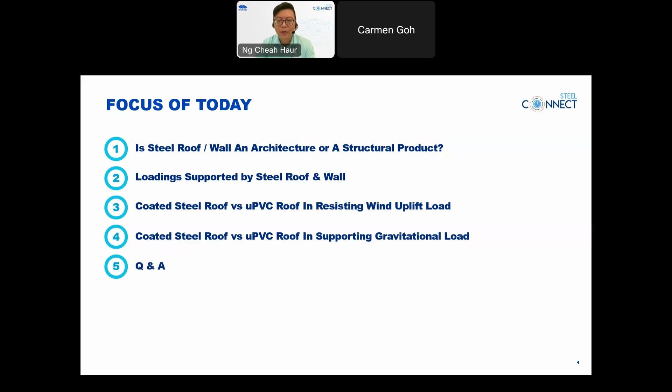Of course, we will explore what kind of loads are supported by the roof and wall, especially in the coated steel. Then lastly, I will compare the wind uplift capacity and how the gravitational load is supported by the coated steel product and also the UPVC roof, right? And by the end of the session, as I mentioned just now, we are open for Q&A, and I will answer the questions from the floor. Just to share with you, this is not a lengthy knowledge sharing, but it will consist of a few pieces of information that might be worth taking away after this session.

All right. Okay, without further ado, let's start with the first topic of today, which is to identify whether the coated steel roof and wall is an architectural or structural product. Because today we're talking about the loading challenges supported by the coated steel roof and wall, right? But if it is an architectural product, why is there loading acting on it? So this is what we're going to explore in this section. Okay, steel roof and wall is widely used in different types of buildings, right?

Range from, let's say, infrastructure, industrial, public utilities, commercial, residential, and etc. So the main function of the steel roof and wall is to protect the residents inside the building from the weather, and the secondary purpose is providing aesthetic appeal to the building.

So colors provide visual delight and design options, whereas the base steel offers sufficient strength capacity to support or resist loading that acts on the coated steel roof and wall. So this is how the coated steel roof and wall protect us from the extreme weather nowadays, and secure the building from break-ins also. So in short, the coated steel roof and wall should perform aesthetically and also structurally.

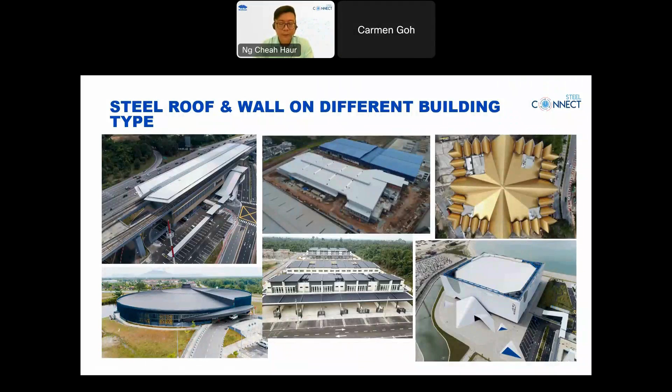Right. Since coated steel roof and wall need to perform aesthetically and structurally, who designs the coated steel roof and wall on the building? Does the architect design the coated steel roof and wall? Yes, it should be, because they are the professionals who design the building to present aesthetically, right? However, engineers should be involved too, because he or she designs the coated steel roof and wall to be structurally sound. So in short, yes, both of them are involved in designing the coated steel roof and wall.

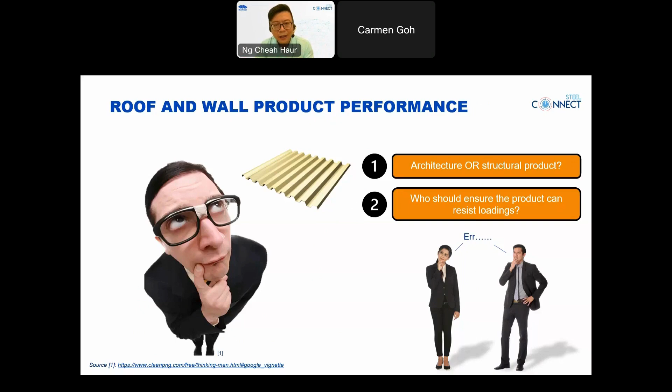So some of you may still have the question: architect and engineer are both involved in the coated steel roof and wall design, so in that case, should coated steel roof and wall be considered an architectural or structural product? In addition, who should be responsible to check and ensure the product can resist or support loadings? Is it the architect or the engineer? Some may not be clear, right?

So let us take a step back to the basics and explore what architecture is and what engineering is. Architectural work is focused on the building and the physical structure design. In layman's terms, it means what kind of building or structure he or she designs. Whereas engineering work focuses on the technical and structural aspects of construction. So in short, it is how the building or the structure is being constructed. So there are two different aspects in two areas, right?

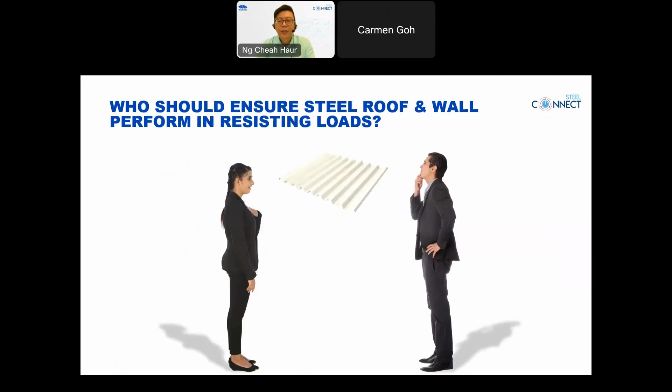So based on the description of architecture and engineering scope of work in the previous slide, the coated steel roof and wall is actually in a very awkward position, right? It's like a kid without a mom. On one hand, the architect thinks, I am responsible for the coated steel roof and wall design and the rainwater runoff calculation for the steel roof only, and the steel roof and wall structural performance should be the engineer's responsibility.

But on the other hand, the engineer thinks, yes, I'm responsible for the structural design up to the purlin or girt. The steel roof and wall should be under the architect's design because it's an architectural product. So is it true that none of them should be responsible for the product performance in terms of loading support or resistance, even though both professions are involved in the coated steel roof and wall design? Okay, let's explore in a little more detail what the architect and the engineer do in the coated steel roof and wall design.

The architect is in charge of selecting the right profile and the colors for the coated steel roof and wall design, does the detailing methods, and is also responsible for calculating the rainwater drainage from the roof. And the engineer is responsible for the loading design and the building structure design, and their liability is maybe only up to the roof purlin or the wall girt design. So whatever components or cladding over the roof purlin or the wall girt are not the engineer's responsibility, right? So based on the responsibilities of the engineer and the architect as described, should coated steel roof and wall be considered an architectural or structural product?

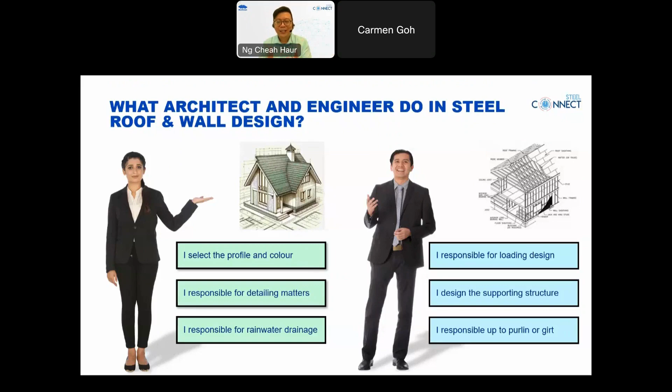Hard to say, right? It's still in the dilemma stage. So let's analyze it in detail in the subsequent slide. Okay, based on this building sketch, the building will be exposed to the wind load that acts on the roof and wall, right? In addition, the human traffic load also acts on the roof because people need to walk on it to survey, maybe to do some integration of systems like solar panels or safety lifelines or other things on it. So there will be gravitational load on top also.

So now let's analyze each component of the building, all right? Okay, start with the purlin. Purlin, there's no argument at all. This is a structural product because it's mainly used to resist wind load and support downward load at the same time, which is the human load. This is for the purlin. And wall girt is the same as purlin. We can say it's 100% structural product because it is used to resist the wind load only, all right?

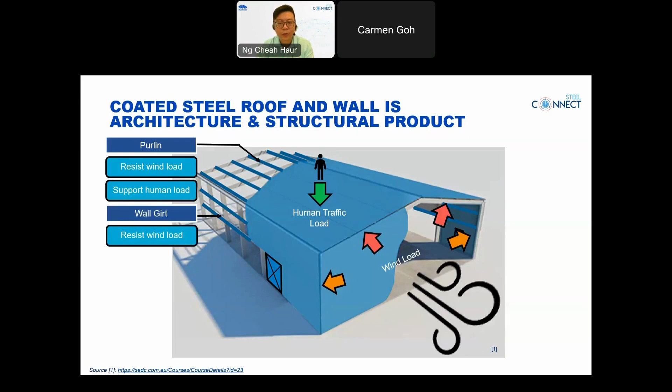Okay, now let's take a look at the coated steel wall. The cladding is provided to be aesthetically pleasing for the building design. However, at the same time, it is used to resist the wind load. All right. So now let's take a look at the roof. It is used to provide visual delight and also drain out the rainwater effectively. At the same time, it is used to resist the wind load and support the human traffic load. So therefore, coated steel roof and wall is considered an architectural and structural product. So it's not either one, all right?

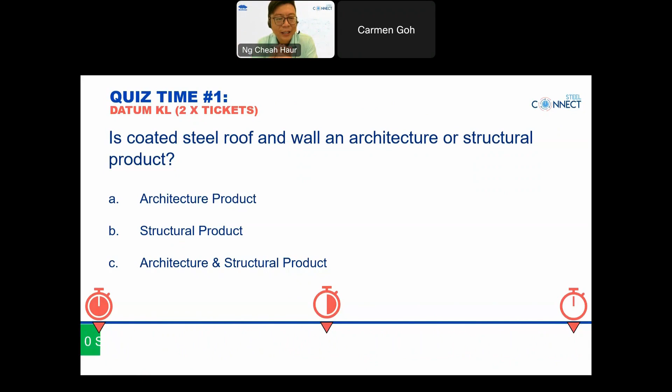So is coated steel roof and wall an architectural or structural product? A is purely architectural, B is structural, and C is architectural and structural product. You can start your answer now, giving 10 seconds. If you haven't gotten through all the slides just now, you can just guess. All right, time's up. So the answer is C, architectural and structural product.

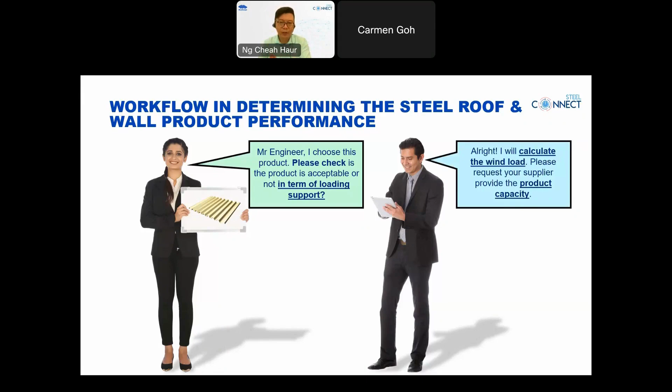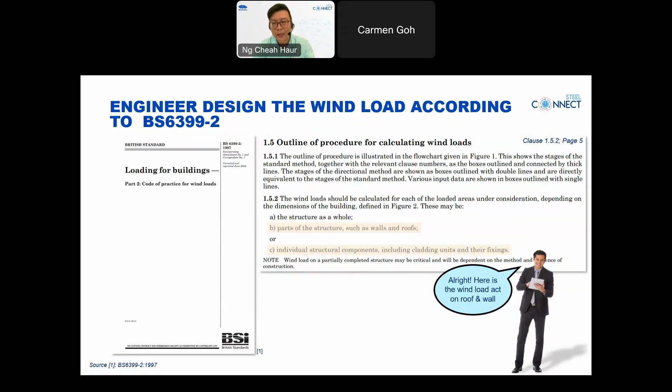Next, actually, the architect should pass the information about the product performance capacity to the engineer. Then the engineer will calculate the wind load and compare the product performance capacity with the design wind load. So how does the engineer design for the wind load? In general, the engineer will calculate the wind load using BS 6399 Part 2. Based on clause 1.5.2 on page 5, as shown here, it's clearly stated that the roof and wall or cladding units and their fixings should be considered as a loaded area, and should be checked by the engineer. So the engineer will base on that to calculate the wind load and check whether the roof or wall sheet is able to sustain the wind load.

All right. Optionally, the engineer can also use another code, called MS EN 1991-1-4. Refer to clause 1.1, bracket 1, on page 9 of this code. It also states that the cladding units and their fixings should be considered as a loaded area, and should be designed and checked by the engineer.

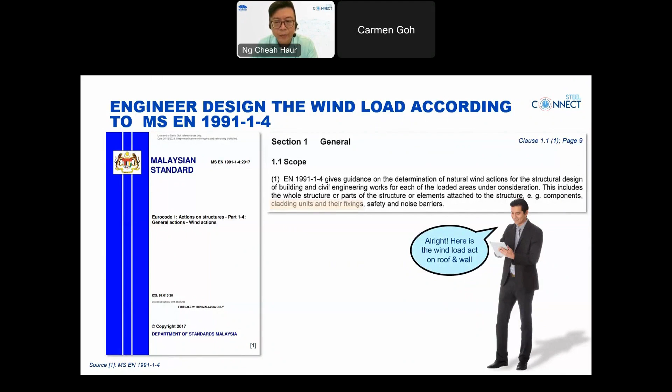All right. So the engineer will check based on the code that I mentioned just now, either BS 6399-2 or MS EN 1991-1-4, and then compare the design wind load to the product wind uplift capacity. The result of the checking can be either the engineer approves the product because it is able to resist the wind load, or the engineer will advise the architect to select thicker material or choose another product because the wind load capacity of the original product is lower than the calculated wind load.

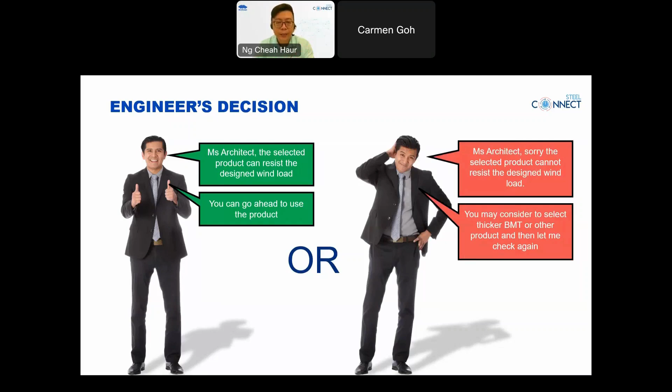So this is the engineer's decision after they calculate the wind load, all right? Okay, we are talking about the wind load on the roof and wall, but how is the wind load acting on it? In addition, what other load is supported by the coated steel roof and wall, right? So we will explore it in this section now.

Okay, basically there will be two major forces acting on the coated steel roof and wall. The first one we simply call a push and pull force, which is the wind load that creates the negative or positive pressure on the coated steel roof and wall. It causes the roof or the wall to either lift up or suck into the inner space. However, in most cases, the lift up action happens.

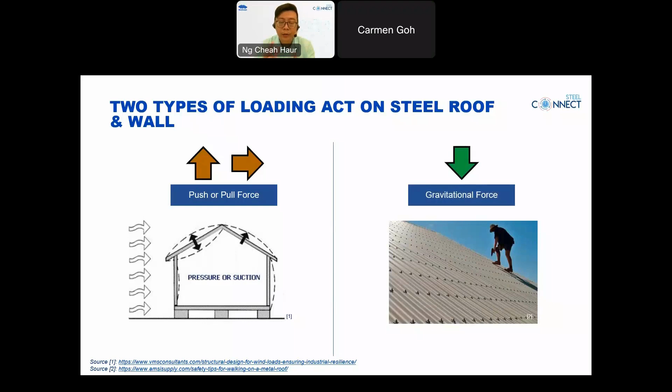All right. So the second one is called the gravitational force. This is the pushing down force caused by gravity. Normally the force will be acting on the roof, and it is caused by human traffic or the temporary construction load. There will be two types of forces that may act on the coated steel roof or wall. Okay, so let us explore them one by one. Let's start with the wind load.

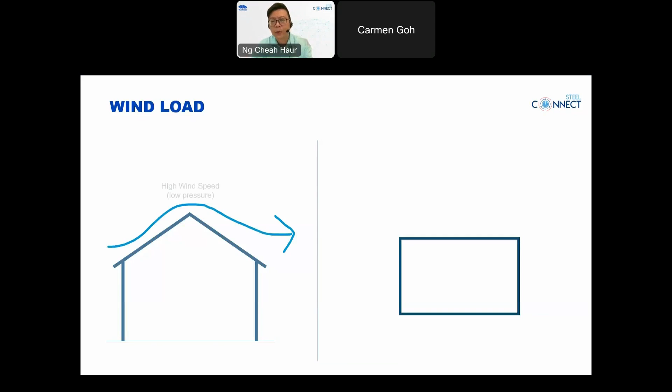Okay, the concept of the wind load acting on the roof is very simple. According to the hydrodynamic concept, when the fluid is moving very fast, the pressure gets low. In reverse, the pressure is higher if the fluid moves slowly. So hence, when the wind flows at high speed over the roof due to the aerodynamics, it creates a lower pressure compared to the inner space of the building where the air is static. As such, the higher pressure inside the building will push the roofing out, and that is how the uplifting effect happens on the roof.

All right. The same scenario will happen on the wall too. The higher pressure from the inner space will push the wall outwards when the low pressure is happening outside due to the high wind speed. So normally the wind uplift effect on the roof is more severe than the pushing out of the wall. That's due to many reasons such as the aerodynamic effect, the support spacing, and also the wind speed, etc. So due to all this, you hardly see the wall fail in wind, but you will see it more on the roof.

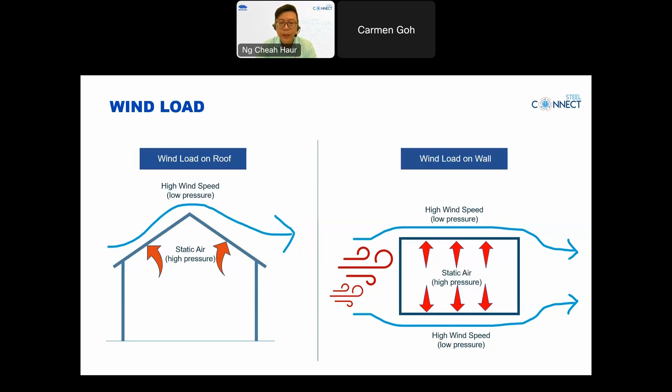Okay, as I mentioned just now, the short clips that you saw are the most extreme cases of roof failure. So from another angle, maybe someone will ask, does it mean that as long as the roof does not fly away, there's no failure? I can give you the certain answer: no. As such, we shall define well the principle of the roof's capability to resist the wind load. In other words, how we judge that the roof has failed under wind load even though it does not fly away. I hope the following info can help you choose the right product for your projects.

Okay, the first one we call the so-called serviceability stage. What it means is we should not allow the roof to over deflect or bend upwards until it damages any mounting system on top of the roof, such as the safety lifeline, solar panel system, or even any flashing attached on top. When the roof over deflects or bends upwards, it will make the mounting system disengage and then it will fall from the roof.

All right. It is normal that the roof will deflect and bend upwards when the wind load is acting on the roof, and it happens whenever the wind flows over the roof. So the roof shall be able to return to its flatness when the wind disappears.

It shall not be permanently bent after the wind load is gone. So it means that when the wind is coming in, the roof is allowed to deflect upwards, but it's not that severe. You cannot accept that the roof is bent up like a balloon. It allows deflection upwards, but it's subject to the principle that when the wind is gone, the roof has to return to flatness as the original position. All right, this is how the principle is.

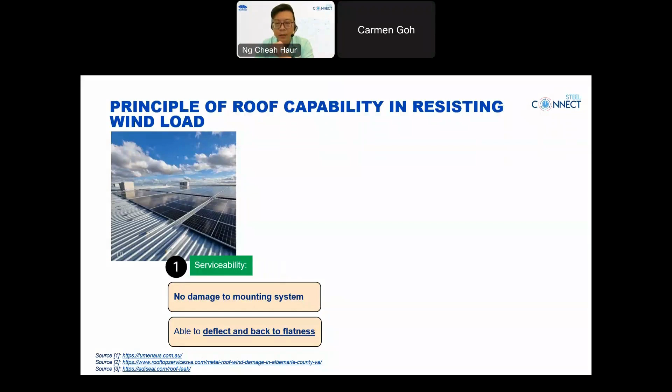So the next is about the strength stage. The roof might already be failed in strength, meaning it can no longer continue to support the wind load as guaranteed. The first principle is that the roof shall not cause water leakage immediately when it fails in strength. So even though the roof is allowed to fail in strength, it shouldn't cause instant water leakage when the storm is coming in.

Secondly, the roof sheet shall not break into pieces, or any item fly off from the roof when it fails in strength. So what does it mean? I purposely put this into the red box here, because I want to elaborate more about what does it mean by the roof should not break into pieces, with no fragments or broken pieces flying away.

For the long length roof sheet, it should not break or burst into pieces like a balloon when it fails in resisting wind load. Just like the short clip you saw in the previous slides, when the roof fails, it doesn't really burst like a balloon. It will fly off in pieces, or maybe buckle locally. The broken fragments or small components that fly off scatteringly will cause hazard to the public, so I will explain more in detail in the next section of this webinar. Just bear in mind that if the roofing sheet can break into full pieces, it's not acceptable.

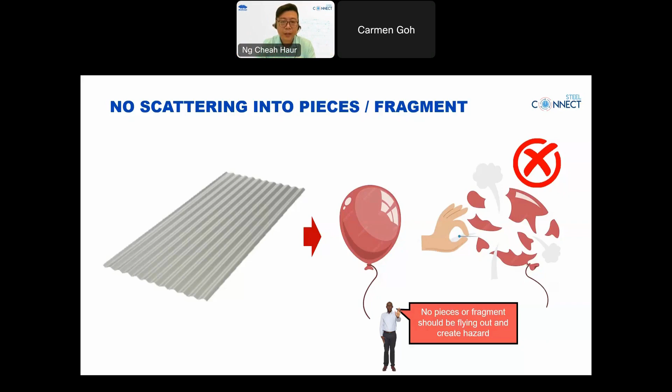So the answer is A. Congratulations to those who answered the right answer. Okay, let's continue.

So now we understand about the wind load and how to define the principle of the roof capability in resisting wind load. However, maybe some of you aren't sure how the wind load is calculated, so I'll share it with you now. As mentioned earlier, there are two design standards that can be used by engineers to calculate the wind load in Malaysia, which is either BS 6399 Part 2 or MS EN 1991-1-4. Both design standards share a similar design concept, and the wind load design method is quite similar too. So no matter which standard is used or referred by the engineer, the factors that affect the wind load design are the same. Let's explore it.

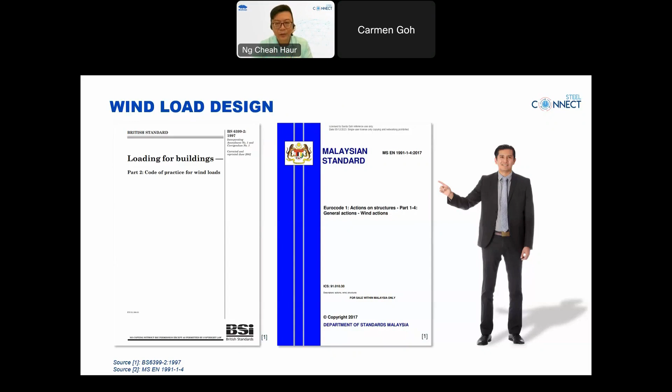The factors that determine the wind load acting on a building include, first, the wind speed. The second will be the altitude, the location of the building, whether at lowland or highland. The third will be the terrain, whether the site is on a plain field, surrounded by hills, or mixed. Lastly, the location of the site, whether at the seaside or inland, will affect the wind load. These are the geographic factors that cause the wind load to change according to the location of a building.

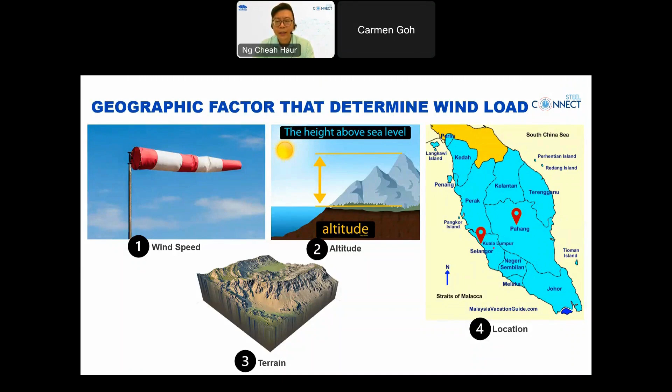So as such, we cannot assume that the wind load will be the same when the building is located at a different site, even though it is the same building design. Let's put an example: a building located at the seaside at Selangor, and the same building, same design, located at the mainland of Pahang - the wind load will be different.

Engineers should check and design the wind load of every building unless they have sufficient experience or sufficient past project reference, where they're aware that the wind load difference at the different site is negligible.

Let's put an example. This particular engineer already designed a lot of buildings in this Pahang area. They roughly know what is the wind load at this particular area with this kind of building design, so they can guess what wind load can be used. Otherwise, for each building design, you need to check on the wind load.

So this is the geographic factors. But we have another factor that affects it, which is called building design factors, like building shape and size, building distance, and then the opening design on a building such as the size and the number of windows and doors, or whether it's an open or enclosed space. And lastly is the roof type and roof gradient.

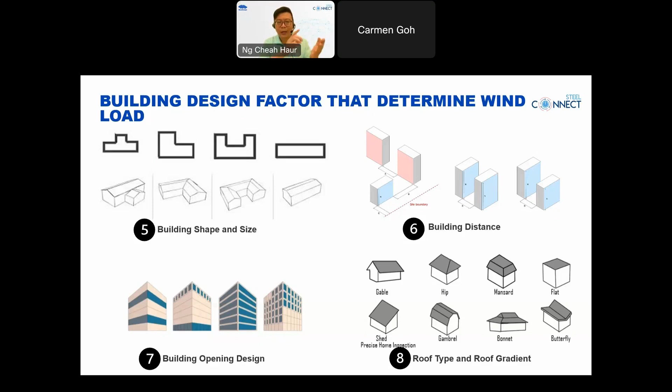Most people may not be aware that the type of roof and the gradient is an important factor that determines the wind load. They just assume this is part of the building design by the architect, but actually it's not. So I hope now we all understand that there are at least 8 factors, maybe more, that determine the wind load acting on a building - at least 4 in the geographic factor, and another 4 in the building design factor.

Based on the last 2 slides, we understand that the wind load is determined by at least 8 factors, and the wind speed is only one of the factors. As such, an engineer is not able to give you the answer about what level of wind speed the roof can resist. They can only tell you that they used XX wind speed in the design and the wind load is XX value. So what does it mean? I will explain in the subsequent slide.

So by right, the workflow starts with the engineer designing the wind load based on one of the two standards I mentioned - either BS 6399 Part 2 or MS EN 1991-1-4. They refer to these 8 main factors, then they will get a design wind load in the unit of kPa or kilonewton per meter square.

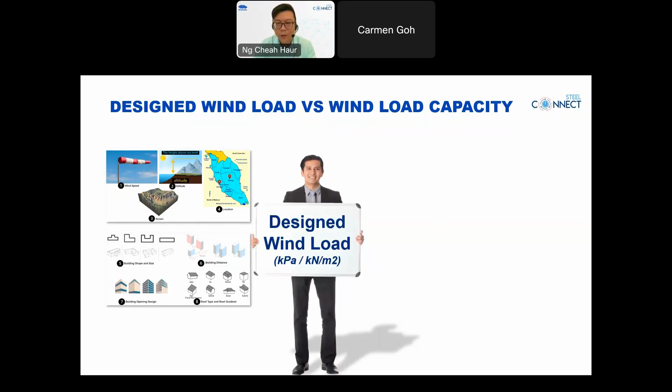The engineer can either pass the design wind load to the architect to check it with the product's wind load capacity, or they can help the architect compare the design wind load with the wind load capacity of the product, also shown in kPa or kilonewton per meter square. If the wind load capacity of the product is higher than the design wind load, it passes the requirement and the product can be used in the project.

In reverse, if the product cannot support the design wind load, it fails. So as you can see, the comparison between the design wind load and the wind load capacity of the product is in kPa or kilonewton per meter square - it is not meters per second or kilometers per hour. So we do not compare wind speed capacity, but we compare wind load.

Last but not least, the roof must be able to support human traffic load during maintenance or system integration work, such as solar panel installation. This means that for any installation, you still need to ensure this roof can be walked on by humans after many years, because people still need to go out and do maintenance, do inspection, or if you need to install a solar panel on top, you must ensure people can walk on it and even work on it.

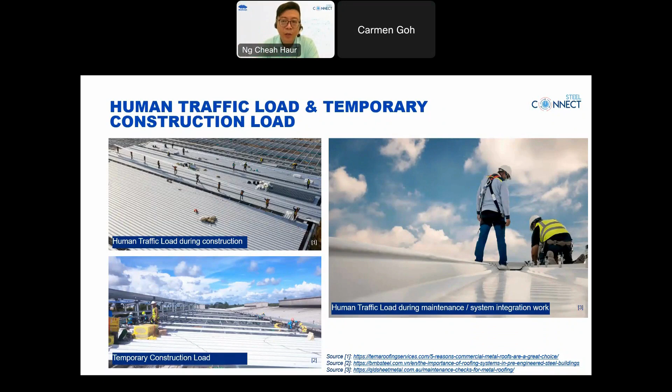In the last section we discussed how to define the principle of the roof in supporting wind load. Now let's take a look at its ability in supporting human traffic load.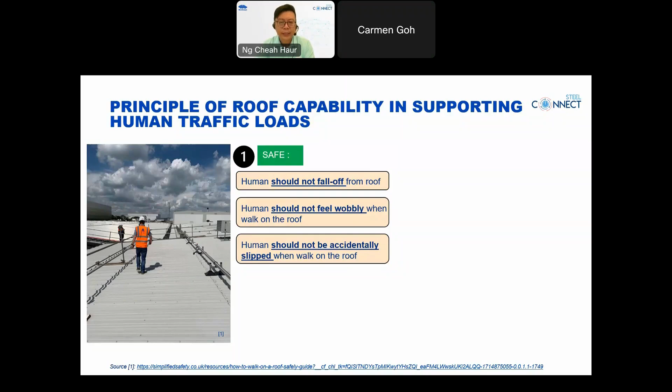Firstly, this is about safety. The roof is defined as capable of supporting human traffic load when it is able to let a human walk on it without falling off. He or she will not feel wobbly when walking on it, and the roof should not create any risk of making humans slip. So this is the basic principle: the roof must create a very safe platform for people to walk on and work on.

Secondly, there should be no permanent damage found on the roof sheet when the temporary loading disappears. This permanent damage includes things like opening of the side lap or local indentation. This means that after people walk off the roof, you shouldn't see any damage on the roof. Then it's defined that this roof is safe to support human traffic load.

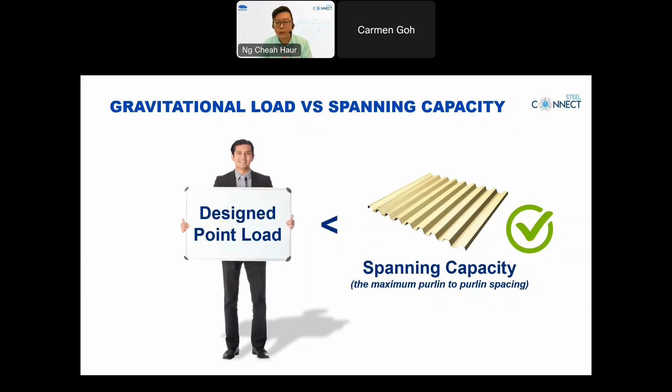The way we assess or compare product capacity to the gravitational load is very straightforward. The engineer will define the design point load acting on the roof based on international standards, then compare it with the spanning capacity of the roofing products, which is the maximum support spacing between the purlins. As long as the spanning capacity of the product is greater than the design point load, the product can be used to support human traffic load or temporary construction load.

C, no permanent damage happen on the roof. So you're given 10 seconds. You can give your answer now. I think it's pretty straightforward. I think a lot of people will give the right answer. All right. Another 3 seconds.

Okay, time's up. Yes, the answer is B. Slip on the roof is also not acceptable because you must provide a very safe platform for people to walk on it and work on it. All right. Okay, let's continue.

Okay, now we talk about the product performance capacity. So no matter whether we talk about the wind load or the human traffic load or temporary construction load to be supported by the roof, it fully relies on the product performance capacity. So we need to ensure the product performance capacity is always higher than the design loads, right? But what is the product performance capacity and how do we define it? So let's check it out in this subsection.

Cool. Regarding the method to assess the wind load capacity of the roof products, it is clearly stated in MS 2500, clause 4.3.2. I'm not going to talk about it in detail. I will highlight a few important points. Okay, the clause states that the wind load capacity can be determined either by calculation, as stated here, 1993-1-3, or by testing according to MS 2523.

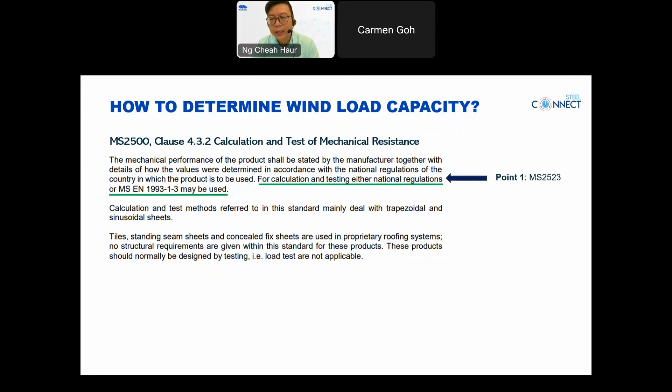All right. The calculation or testing is only applicable for the trapezoidal or the sinusoidal sheets, which is the screw fixed corrugated product, as we commonly name it in the industry. Then for other products such as tiles, standing seam, or the concealed fixed sheets, the calculation is not applicable because these products are normally designed by testing. So in other words, the standard allows users to adopt the testing from the manufacturer, right?

So regarding the spanning capacity in supporting the human traffic load or temporary construction load, MS 2500 gives us a guideline too. According to MS 2500, the spanning capacity of a roof product to support the gravitational load is not mandatory. However, if the product performance needs to be confirmed, the code suggests that we refer to the testing standard MS 2523, particularly clause 7.

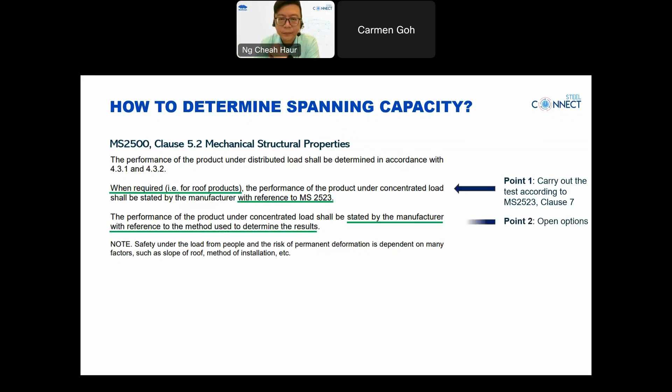All right. However, the standard also gives us another option, that we can adopt the result from the manufacturer based on the method used. So as long as the manufacturer can tell you how they tested the spanning capacity, it can actually be used. All right, this is an open option.

Okay, so MS 2500 gives us clear direction on how to determine the wind load and the concentrated load capacity of the roof products, right? Especially on the wind load capacity, we can choose either testing or calculation, right? However, can we really determine the wind load capacity of a roof product by calculation? This is the first question. Or between testing and calculation, which is the best solution to get a reliable result of the product performance?

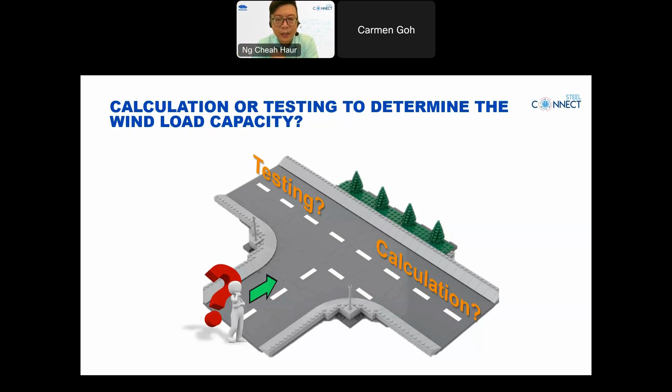Let's say you come to a T-junction where a supplier or manufacturer gives you two things. They give you the testing and also give you a calculation. So which one actually is better? All right. So we'll share with you our experience. When you intend to rely on structural calculation to determine the wind load capacity of products, before that, we should ask ourselves a few questions, right?

So the first thing is, are we able to produce a calculation that covers all the possibilities of failure for screw fixed products, such as the tension failure of the screw, the pull out, the pull over, the pull through, or the gross distortion of the sheets? So whether all these scenarios can be calculated or not. Okay. If you intend to use a concealed fixed product, are you able to calculate the clipping effect or not? All right. Or if you are using a seaming product, are you able to calculate the unseaming effects?

So you cannot use a structural calculation product to calculate the section moment capacity and assume the wind load, because normally the steel will not burst, but it will fail in the connection. So either it's a screw fail, pull off, pull over, or the unclipping, or maybe unseaming happening, then the roofing sheet will fly away. So this is how the roofing sheet will react.

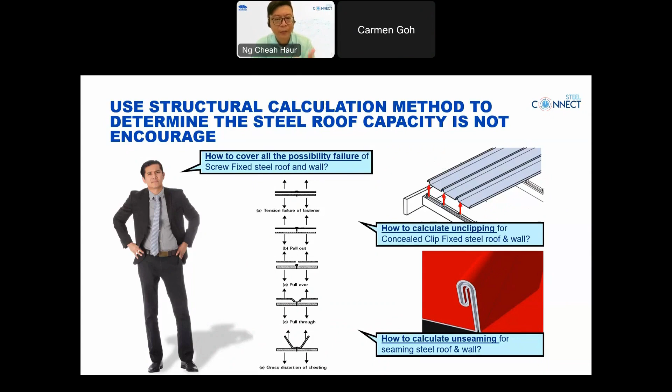So are you able to calculate all this with the design calculation? Maybe yes, maybe no. For example, if you use a finite element calculation, maybe you can achieve that, but you need to try a lot, trial and error. So the most straightforward way, the best option to determine the coated steel roof and wall capacity is by testing, because the result is close to the real world, so the result is more reliable. All right.

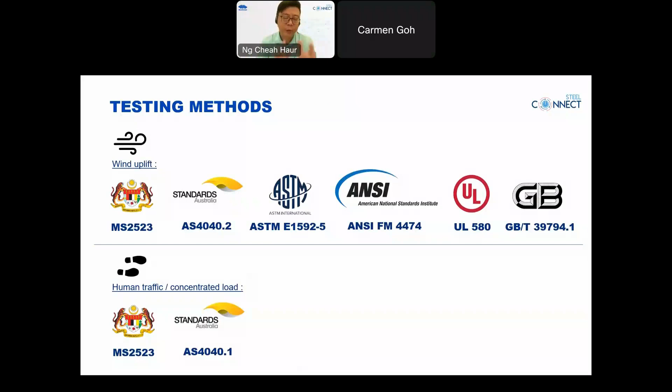Yes, there are a few reliable testing standards available worldwide, such as the Malaysian standard, Australian standard, American standard, and China standard. And even for the concentrated load test or human traffic load test, we also have the Malaysian standard to guide us, and also the Australian standard. Maybe more than that, but in our knowledge, this is what is available worldwide to test the coated steel roof and wall.

All right. Okay, I hope we are all clear about the wind load and the gravitational load or human traffic load acting on the roof and wall. So we also understand the best method to determine the product capacity, right? So now comes the very interesting part. We see how the coated steel roof and UPVC roof react to the wind load, right?

All right. And then the wind uplift testing for case A and case B was conducted using the pressure rig located in our laboratory in Singapore. We adopted the Australian standards AS 1562.1 and AS 4040.2 to assess the roof product performance according to the wind load. So how differently do the roof products react to the wind load? Let's explore it now.

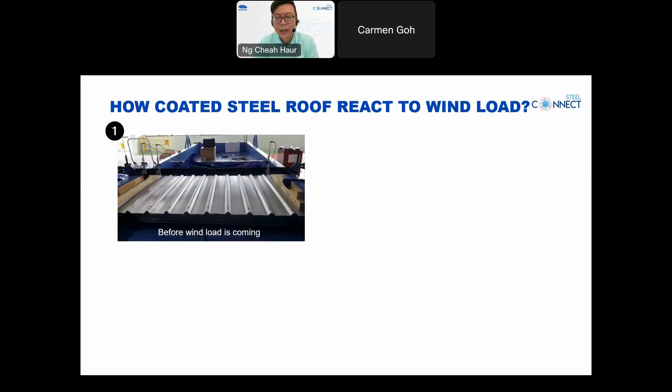All right. So when the wind load starts acting on the roof, some local stresses will appear on the coated steel roof surface. The local stress marks will become more and more severe as the wind load increases. And then eventually the coated steel roof will fail by local buckling when the wind load achieves the maximum level. So in simple terms, the roofing sheet will bend up and is not able to go back to the original shape. Let me just point out where the local buckling is happening. So this is called local buckling.

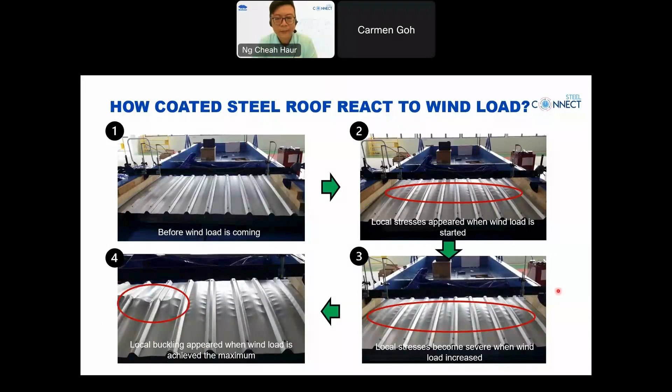All right, let's go next. Okay, this is the photo of the testing specimen after it failed at the maximum wind load, and all the air was released, or the wind load disappeared. So it means we tested everything, we released all the air and let the roofing sheet stay as it is, as you can see.

Right, we investigate the coated steel roofing sheet in more detail now, right? So as you can see, on the left-hand side of the testing specimen, when the wind load is gone, the coated steel roofing is able to go back to the original shape or flatness, as you can see here, right? Because based on the previous slide, all the roofing sheets will bend out when the loading is coming in. But when the wind is gone, it will go back to flatness.

Whereas local buckling is observed on the coated steel roof on the right-hand side, which is this one, all right? This is how the coated steel roof is designed. When the roofing sheet fails at the maximum wind load, the damage only happens locally. As such, it will reduce the risk of water leakage happening immediately.

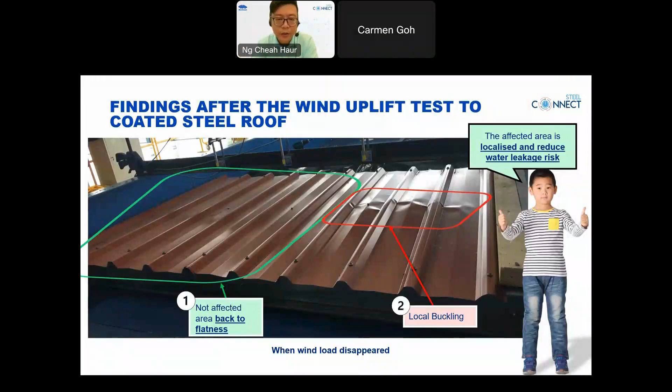So importantly, the coated steel roof sheet will not burst or explode into pieces and violently scatter around in a certain outburst. Which means it will not fly around like a balloon bursting. All right. So this is how the coated steel will react and fail.

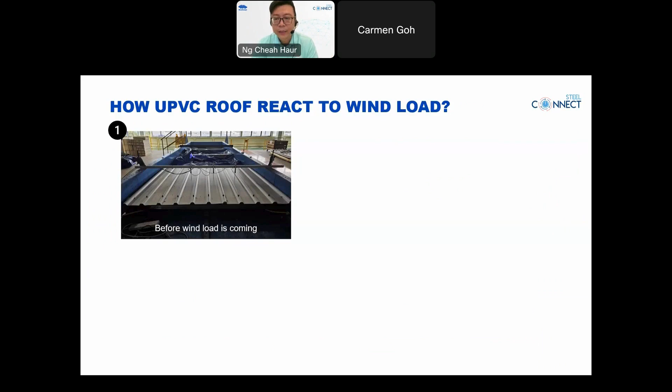All right. Now let's see how the UPVC roof reacts to the wind load. Okay, this photo shows the same setup as shown in the previous slide, but the specimens have been changed to the UPVC roof. So when the air starts to increase underneath the UPVC roof, the roofing sheet bends up instantly. All right. The bending up effect becomes extremely severe when the wind load was increasing.

The interesting part is, based on our standard testing procedure, we normally use an L angle steel bar to prevent the roofing sheet from being blown off in the test. Let me just show you. Okay. So this is the L-shaped angle. Initially, you see this is its position, because this one protects the roofing sheet from flying off.

All right. Okay. However, because the UPVC roof is too soft and it bent up extremely, we had no choice. Then we removed the L angle bar in the middle of the test. So what we can do is just let the technicians and engineers stay far away from the testing rig. For information, this is the first time we encountered this issue, because none of the roofing sheets we tested before is as soft as the UPVC, right?

So at the end of the test, the UPVC roof exploded and broke into pieces in an outburst when the wind load achieved the maximum level. So luckily our technicians and engineers stayed a certain distance from the testing rig, right? So this is how it looks.

Okay, based on the last sharing about the extreme bend out of the UPVC roof, maybe some of you still can't really imagine how different it is compared to the coated steel roof, right? So let me do a side-by-side comparison for you. In engineering terms, when we talk about the roofing sheet bending up, we call it deflection. Okay, let's see how different the deflection of coated steel is compared to the UPVC roof.

So coming to here, maybe some of you still can't really imagine how soft the UPVC roof is and how it deflects and bends up severely when the wind load acts on it. So let me just show you two videos. Okay, so this is the time-lapse video that was taken during the wind uplift test. And this is 1.8 mm thick UPVC roof.

As you can see in this video, the deflection or the bend up of the UPVC roof is very severe. And this is almost over the depth of the testing rig. As you can see here, in the middle of the test we removed the L angle steel bar because it almost touched it when the wind load came to the maximum. All right, so this is for the 1.8 mm.

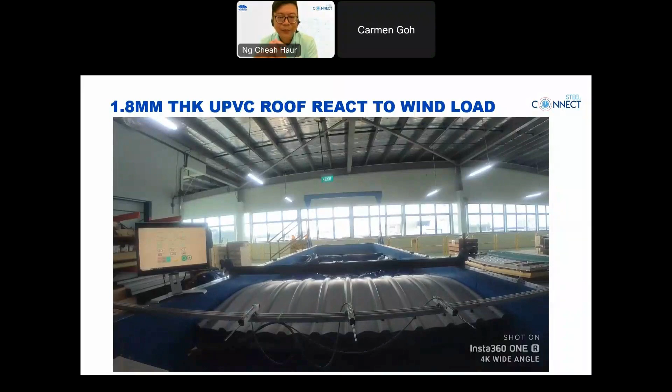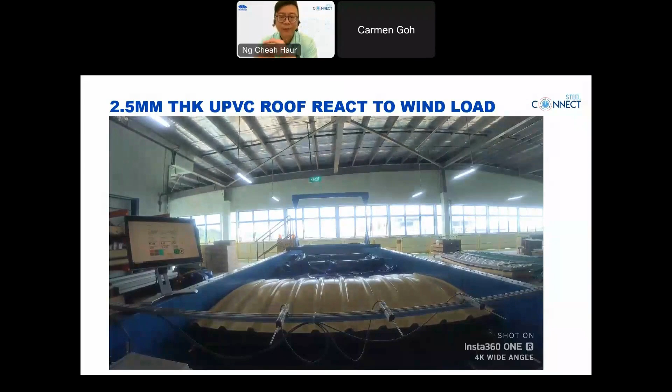All right, let's see if it's any better if we increase the thickness to a 2.5 mm thick UPVC roof. Yes, you can see that the deflection, the bend-up rate, is slower, and the bend-up is also lower than the 1.8 mm. However, the bend-up is still much more severe compared to the coated steel roof because it's too soft, and eventually it will fail by breaking at the connection.

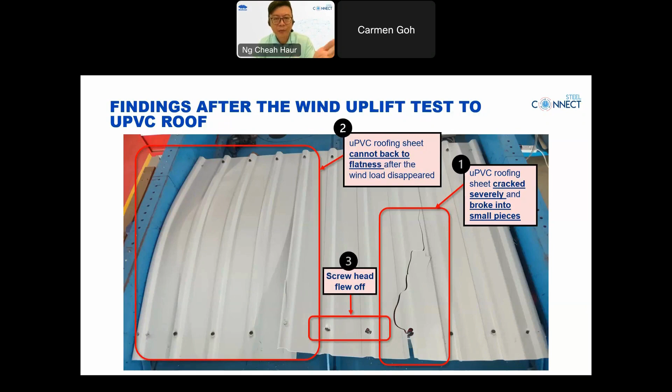Okay, the UPVC roof sheet cracked and broke into small pieces when subjected to the ultimate wind pressure. And the worst case is it's not able to return to flatness after the wind pressure disappeared. And also the screw head will fly off when the pressure comes to the maximum level. So these are the findings after we tested the UPVC roof. But what is the downside of these three main failures and how will they affect us? I will explain it one by one.

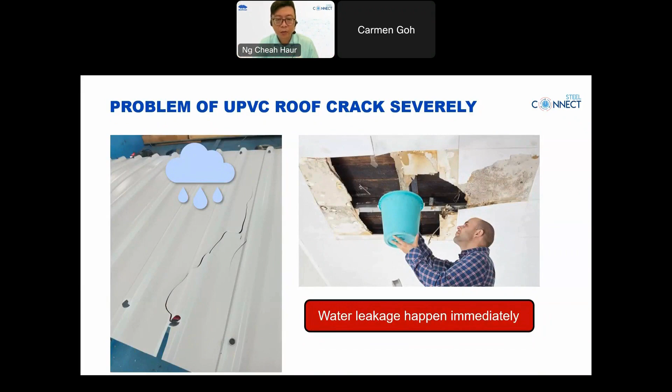When the roofing sheet cracks severely, it creates a big passageway for rainwater instantly. Consequently, water leakage will happen immediately right after the roofing sheet is subjected to wind load. Just imagine that under a storm, in heavy rain, it can break into pieces like that. Then it will create a very big opening for rainwater to come in. So the water leakage will happen immediately.

In normal cases, the roofing sheet will not burst into pieces. However, it happened on the UPVC roof. As you can see in this photo on the left-hand side, when the UPVC roof sheet is subjected to maximum pressure, it breaks into pieces and bursts violently all around the place. So the sharp pieces flying at high speed might create a hazard to the public.

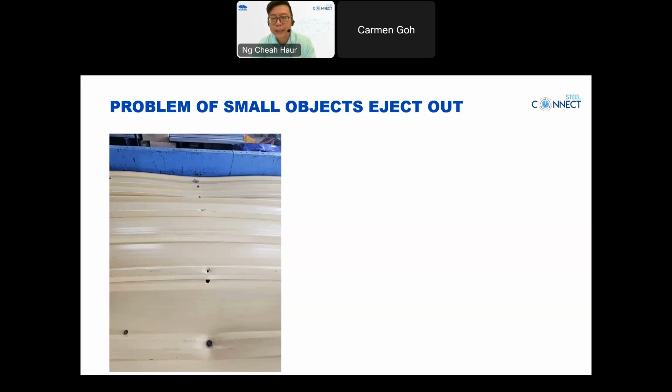So this not only creates a risk to the public, but also causes rainwater leakage immediately. In normal cases, when the coated steel roof is used, the screw head will not fly off because a monolithic screw is used for the connection. But because with UPVC they try to achieve anti-corrosion, none of the components can corrode. So they use this kind of screw with a nylon screw head, but it will easily detach under high wind load. All right.

Based on the last few slides, we are now aware of the outcome of the UPVC roof when it's subjected to wind load. However, how different is the wind load capacity of the coated steel roof compared to the UPVC roof? Let's check it out. Referring to this table, the maximum wind load capacity of 0.42 mm BMT coated steel is 7.94 kPa, but the UPVC roof only supports 6.94 kPa. So the coated steel roof is 14.4% higher than the UPVC roof.

It's quite high, right? But this is not the highest. Let me show you the next table. The maximum wind load capacity of the 0.48 mm BMT is 11.9 kPa, but the 2.5 mm thick UPVC roof achieved a maximum strength of 7.15 kPa.

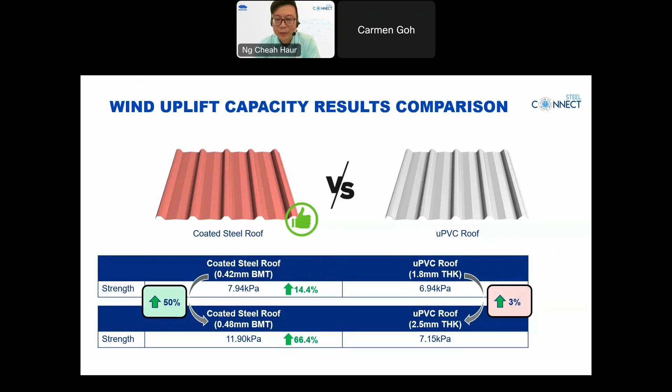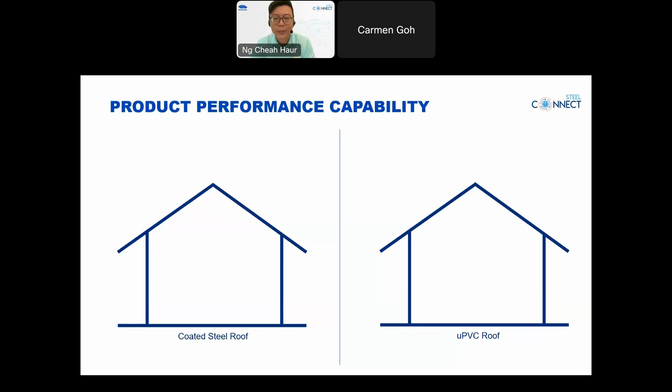So with all these numbers, some of you may not be sure what it means, right? So allow me to explain it in more detail. Imagine that you win the lottery today, then you are crazy enough to buy two identical houses located at exactly the same place. You install the coated steel roof on the house on the left-hand side for your own use. However, you use a UPVC roof with a similar profile on the house on the right-hand side.

So the left-hand side uses coated steel roof, the right-hand side uses UPVC roof. One day, both houses resist the same wind load. Since the coated steel roof has the higher wind uplift capacity, the roof is still intact in good condition without any damage, and you're enjoying the space happily without headache. However, the UPVC roof on the house where your brother stays resists the same wind load, and water leakage happens immediately. Your brother can only use a bucket to collect the rainwater and keep on cursing you.

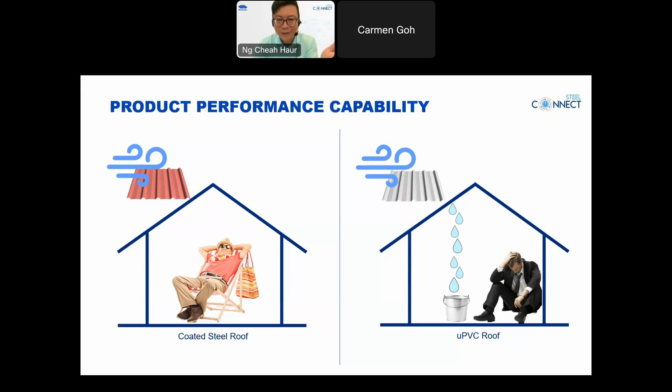So this explains how the difference in wind load capacity will make your life different. A lot of people just concentrate on the material, but the performance against water leakage is more important than everything. Because when water leaks, not only do you have a lot of problems sealing it up, but you will damage a lot of assets inside your building.

All right, let's talk about the performance value. Remember, every cent that you pay for a product is to buy the performance, so you must know what you are buying. For example, you pay more for a car to buy a higher CC. You pay more for a safe to protect your properties or jewelry. Or you pay more for a house to get a better living space. Similarly, it applies to the roofing sheet.

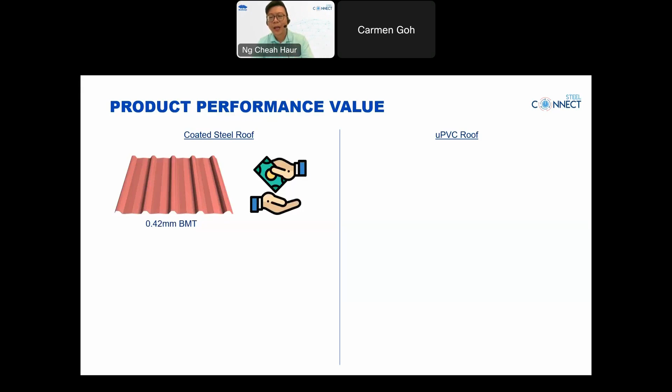You pay a certain amount to buy a 0.42 mm BMT coated steel to protect you and your properties from the weather. Then you pay a higher amount to purchase the same product with increased thickness of 0.48 BMT. Hence, you should expect to gain more from the extra price you spend. So the coated steel provides at least 50% increment in the wind loading capacity

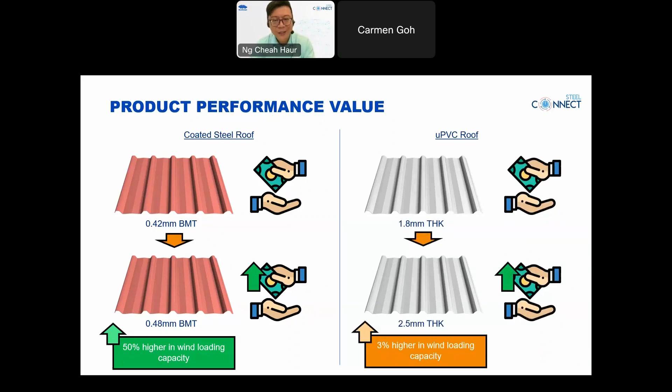for protection from the weather. However, you pay a certain amount to buy 1.8 mm thick UPVC roof, then you pay more to purchase the same product at 2.5 mm thick, and you only get 3% increment in wind uplift performance. For your info, the price difference between 1.8 mm and 2.5 mm thick UPVC is approximately 40%. So what the consumer gets from the 40% price increase is just that it's thicker, because the wind uplift performance of both is more or less the same.

In short, different products will give you different performance. None of the products in the world is perfect, and none of the products is totally flawed. However, you must know what you are paying for and expect the performance accordingly.

All right, so now let's come to the gravitational load. Let's check out how the coated steel roof responds compared to the UPVC roof when dealing with the gravitational load.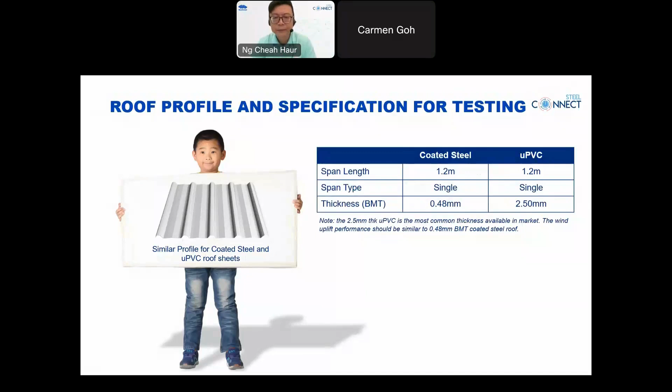All right, let's see how the coated steel reacts to the point load. At first, we start at the serviceability stage by applying the concentrated load at 92.5 kg at the underlap of the roofing sheet. Why 92.5 kg? It's because we are referring to the testing standard AS4040.1, which assumes an adult weight is about 92.5 kg.

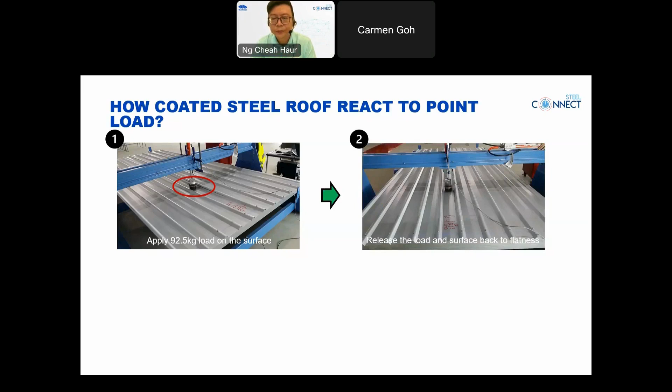During testing, they assume the worst case scenario that the adult is standing on one leg and stepping on that one underlap. The roofing sheet is allowed to deflect, and the side lap is disengaged. However, the roofing sheet must return to flatness and the side lap must seal again when the point load disappears.

If the roofing sheet returns to flatness, we continue with the test to the strength stage, applying 274.5 kg load. This simulates the point load from construction load acting on the roofing sheet. When the ultimate strength load is removed, the roofing sheet should return to flatness; otherwise it's considered failed.

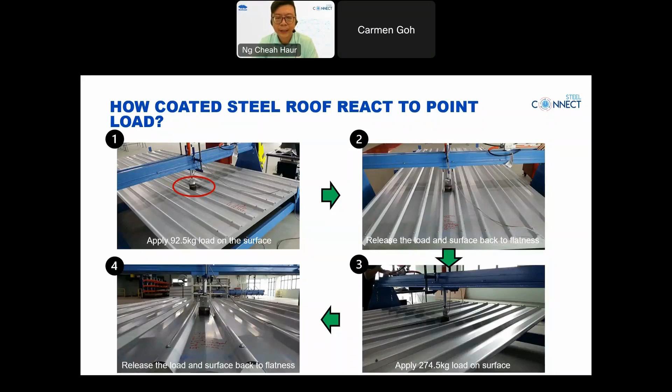Refer to this photo: when the point load is applied on the coated steel roofing sheet, the area at direct contact of the point load deflects the most, becoming less bent as the area moves away from the direct contact point. Eventually you form a contour shape. The smaller the contour shape, the better, because the bending of the roofing is lesser.

So it's safer for human traffic on the roof. As you can see in this photo, the contour shape on the coated steel is small and localized when the point load is applied, reducing the hazard to people walking or working on it.

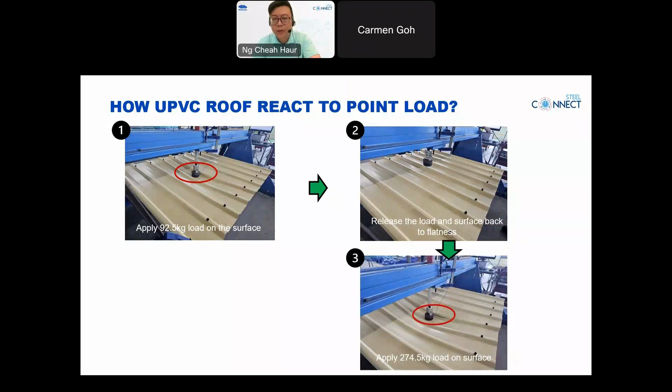Now let's take a look at the reaction of UPVC when resisting the point load. Similar to the coated steel test, we apply the same serviceability load of 92.5 kg onto the UPVC roof, then release it and observe the response. The results show the UPVC roof is able to return to flatness. It's a good thing. After that, we increase the load to 274.5 kg, and then release it.

The UPVC roof can also return to flatness. However, the bending or deflection is very severe compared to the coated steel. Let's take a look at the time-lapse video in the subsequent slide.

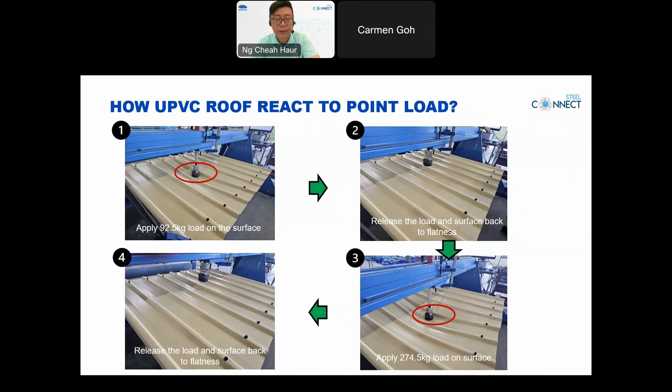This shows the deflection of the UPVC roof under point load. The contour shape is more severe than the coated steel roof, and the deflect area is bigger. This creates an unstable, unsafe working platform on the roof, where workers may easily slip or trip due to the uneven surface.

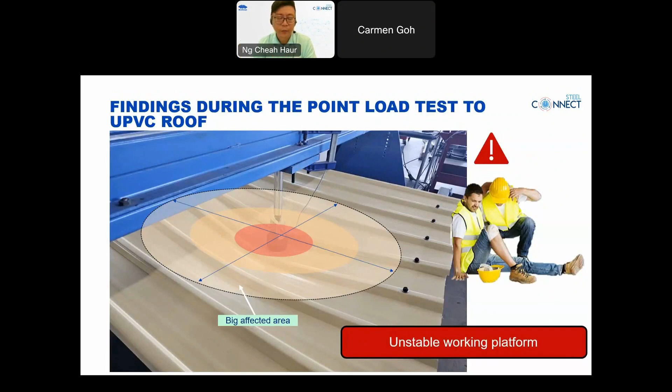This might help you visualize the difference in safety when walking on the coated steel versus the uPVC roof. Let's take a look at the next slide.

The video on the left shows how the coated steel roof reacts when a human walks on it. The coated steel roof is stable, rigid, and solid when people walk on it. No matter whether we walk on the purlin area or in between the purlins, the movement or deflection is very minimal. As such, it is safe for workers to walk on it.

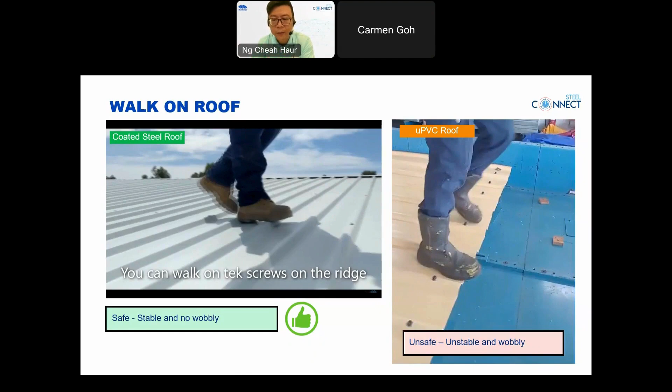Whereas the UPVC roof is too soft for human traffic. This video shows an operator walking on a multiple-span UPVC roof. The roof deflects easily and wobbles. For your info, the weight of this operator is only 60 kg. The roof bends down easily, especially at the overlap area. As such, it's quite high risk when a worker walks on it or does work on top of it, because it is an unstable working platform.

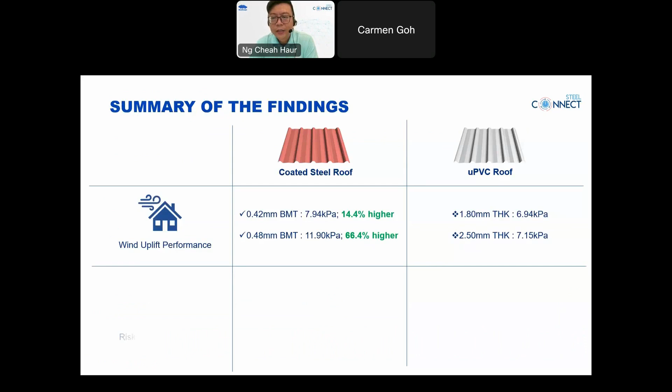Let me summarize the points of discussion. The wind uplift performance of the coated steel is higher than the UPVC roof. So the risk of immediate water leakage during a storm will not happen on the coated steel because it will not crack or break on the surface. In addition, the non-affected area during maximum wind load will be able to return to flatness after the wind load is gone. However, the UPVC roof will deflect and bend up permanently even though the wind load has disappeared.

The coated steel will not burst or explode into pieces when subjected to wind load, and the screws or screw heads will not fly off the roof, so the hazard to the public is not an issue. In reverse, the UPVC roof will break into pieces and burst when subjected to wind load. In addition, the screw heads will fly out from the roof. All this reaction creates a potential public risk.

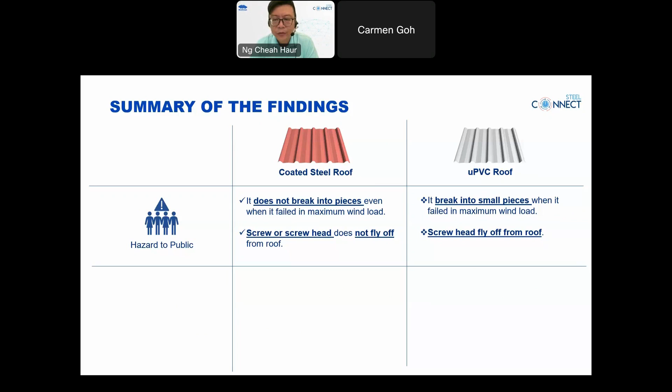Customers pay for better-performing products, because coated steel can provide at least 15% higher wind uplift capacity compared to the UPVC roof. Coated steel roof even gives 50% higher wind uplift performance if the customer pays more for a thicker product. The UPVC roof not only provides lower wind uplift performance, but the manufacturer or supplier charges more for the thicker product while only providing an insignificant—only 3%—improvement in wind uplift capacity.

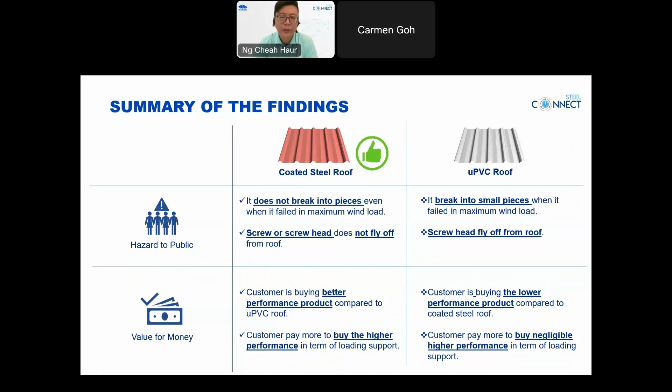The coated steel roof provides a stable platform or mounting system, such as for a solar panel or a safety lifeline, because it will not deflect or bend up severely when wind load acts on the roof. In contrast, the UPVC roof is too soft; it bends upward easily when wind uplift occurs, and this will damage the mounting system.

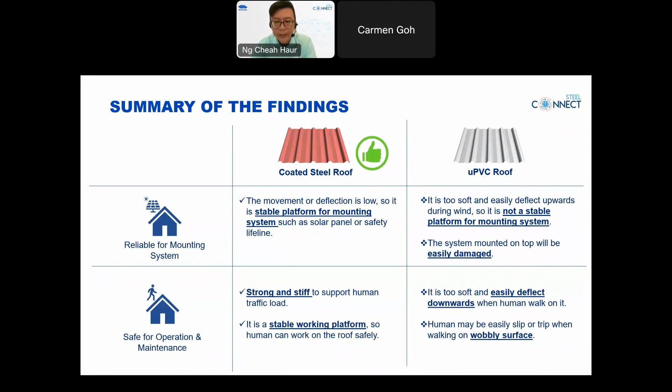Lastly, walking on the coated steel roof is safer than on the UPVC roof because it is strong, stiff, and more stable. In reverse, the UPVC roof is too soft to let people walk on it. It easily deflects or bends downward when resisting human traffic load. Eventually, it creates an unstable walking platform, unsafe to walk on, because it has a high potential risk of making workers slip or trip.

All right, that's the end of my session today. Before I end, I'd like to deliver a message: bear in mind that the same shape but made of different material will not give you the same performance. I hope this sharing session has proved that the performance of the coated steel roof and the UPVC roof will not be the same, even though the profile or shape is similar, because they are made of different materials. That's it for my sharing session today, I hope you enjoyed it.